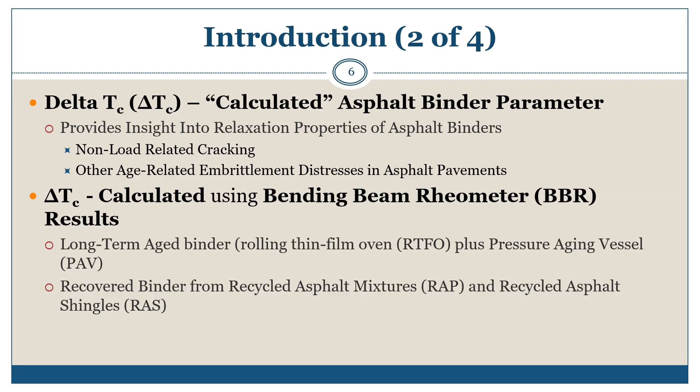Delta TC may be used to evaluate any asphalt binder. Examples include neat asphalt binder with no additives, asphalt binder with additives such as polyphosphoric acid, PPA, and refined engine oil bottoms, or vacuum tower asphalt extender, REOB, VTAE, modified asphalt binders that have been blended with polymers or asphalt additives, and recovered asphalt binder containing RAP, RAS, or combination of these with virgin binders.

Generally, Delta TC may be considered as an indicator of how effectively asphalt binders respond to aging, or how effectively additives impact the response of asphalt binders to aging.

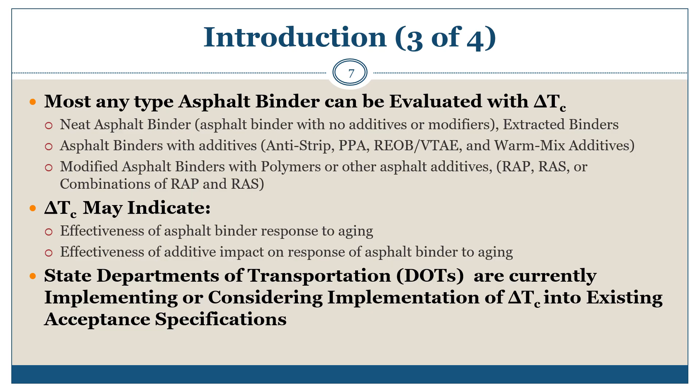Some state departments of transportation, DOTs, have implemented or intend to implement Delta TC as a part of existing acceptance specifications. At the national level, some research projects have considered and are considering Delta TC as part of their studies. This presentation and the companion technical brief present a review and summary of current state of the knowledge of Delta TC as a parameter to characterize asphalt binder behavior.

Information presented is an excerpt and a summary from the Asphalt Institute AI State of the Knowledge Informational Series IS 240, available at the Asphalt Institute website, asphaltinstitute.org.

The objective is to provide knowledge for responsible deployment of Delta TC as an asphalt binder specification parameter should state DOTs be considering implementation. As information on Delta TC evolves and the state DOT has a pressing need to implement, the intended purpose is to provide some preliminary consideration whether to proceed or not. The scope of this report is limited to the deployment of the Delta TC parameter into asphalt binder acceptance specifications.

An advantage of Delta TC is it can be calculated in a straightforward manner from results of BBR tests already used in acceptance. Some brief background comments may provide information on the evolution of the Delta TC parameter.

The delta TC parameter was conceptualized during the Strategic Highway Research Program, SHRP, and later suggested as an indicator of pavement performance in a research project sponsored by the Airfield Asphalt Pavement Technology Program, AAPTP, Project 06-01, Techniques for Prevention and Remediation of Non-Load Distresses in Hot Mix Asphalt HMA Airport Pavements. The goal was to identify simple asphalt binder and mixture tests which could predict imminent cracking or raveling so that pavement preservation strategies could be timed to delay or prevent damage on general aviation airports. The study concluded that delta TC had promise as a tool for neat asphalt binders to predict ductility and analyze durability related properties of aged asphalt pavements. Delta TC has evolved as a parameter used to evaluate relaxation properties of asphalt binders. More information on the origin of delta TC can be attained from Chapter 2 of IS 240.

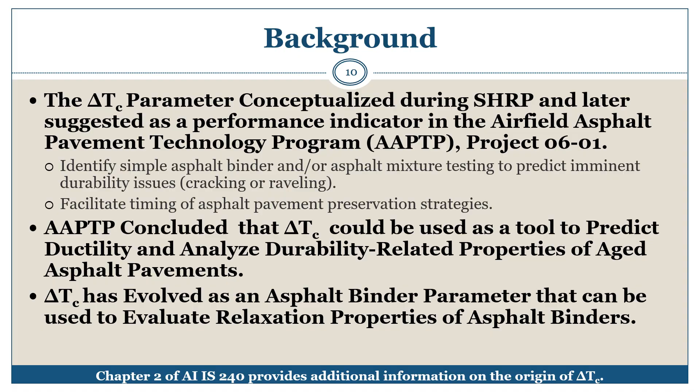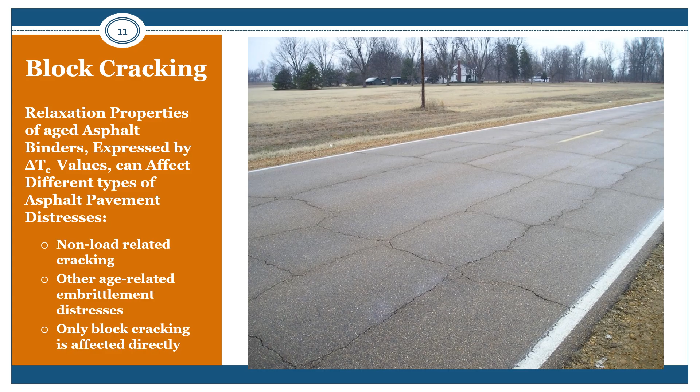Relaxation properties of asphalt binders expressed by delta TC values can affect several types of asphalt pavement distresses, including non-load related cracking and other age-related embrittlement distresses. Only block cracking, as presented in this photo, has been directly correlated to delta TC. Several factors can contribute to other forms of distress: fatigue, edge, longitudinal, reflection, and transverse cracking, raveling, and potholes. It is most likely readily apparent the indirect relationship delta TC has with the pavement distresses listed in this table. While delta TC may be a contributing factor, pavement structure, environment, and loading are among other factors that may also contribute to these distresses.

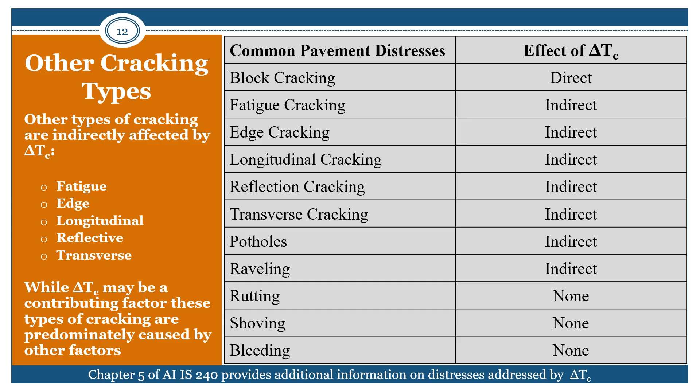How is delta TC determined?

The delta TC parameter is an indicator of how effectively asphalt binder responds to aging and how incorporation of additives may impact the response of asphalt binder to aging. Delta TC is represented as the difference in critical low temperature values of asphalt binder according to the SuperPave performance grading methodology. Results from the BBR test, AASHTO T313, are used to calculate delta TC. The critical temperature, T sub C, for both creep stiffness S, designated as T sub CS, and creep rate M, designated as T sub CM, are determined at the specified performance grade PG limits according to AASHTO M320, performance grade binder specification, or AASHTO M332, MSCR performance grade binder specification, with condition and limit values of 300 megapascals and 0.300 respectively. Delta TC is then calculated by subtracting the M critical T sub CM temperature from the S critical T sub CS temperature.

This figure presents a graphic depiction of delta TC. This is where the M value, the temperature where the M value is exactly M equals 0.300. This is where the S value exactly equals S equals 300 megapascals. The delta TC is the differential between these two temperatures, or delta TC equals T sub CS minus T sub CM, which gives us the delta TC. In this case, the delta TC is a positive 1.4 degrees Celsius.

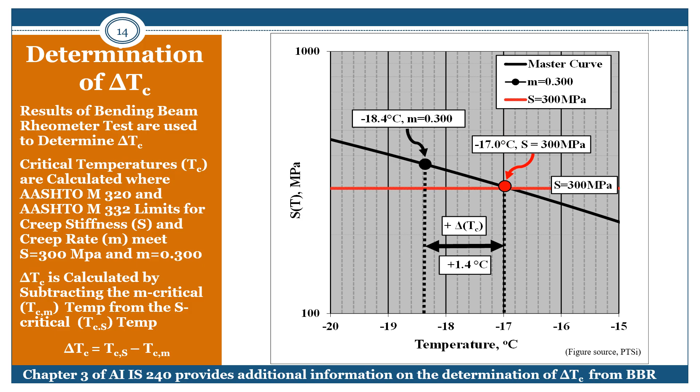What does all of this mean? Depending on the values of T sub CS and T sub CM, the sign of delta TC is either positive or negative, which indicates whether the binder's low temperature performance grade, PG, is governed by its creep stiffness S value, which is a positive delta TC, or governed by its creep rate M value, which is a negative delta TC. A positive delta TC value indicates that the binder is S controlled, failing the S criteria before the M criteria, while a negative delta TC value indicates the binder is M controlled, failing the M criteria before the S criteria.

The magnitude of the delta TC value, or the absolute value, indicates the degree to which the binder is M controlled or S controlled. In this figure, you can see we have an unaged binder where we have M here and S here, and the delta TC is a positive 1.4 degrees Celsius, which means the S criteria fails before the M criteria. And here we have this same binder aged 20 hours in a PAV, and now you see it's reversed. The M value is failing before the S value, and now we have a negative 1.6 degrees separation for the delta TC.

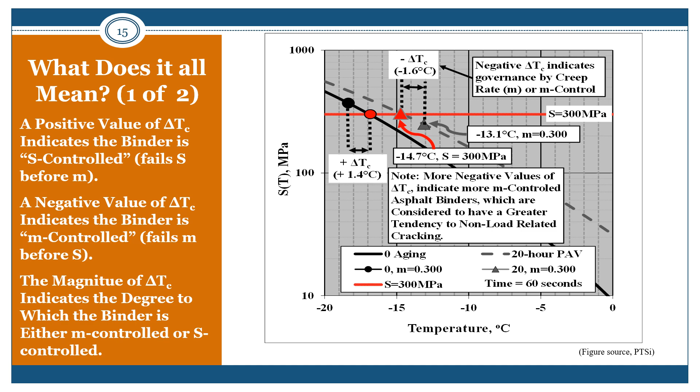In this presentation, delta TC values are presented as degrees Celsius. It is important to understand that the delta TC value represents a difference in temperature, Celsius degrees, as opposed to a specific temperature. Additionally, the negative value does not represent a negative temperature, but that the parameter is M critical creep rate controlled. Again, the magnitude of the delta TC value indicates the degree to which the binder is M controlled or S controlled. The industry has pretty much accepted the degrees Celsius nomenclature, so we'll use this throughout the presentation.

It's what will be used probably in the specification parameters. Research has indicated that more negative values of delta Tc appear to be strongly correlated to non-load related cracking and other distress related to poor relaxation properties.

A delta Tc specification warning limit of minus 2.5 degrees C at 20 hours PAV aging, and a failure limit of minus 5 degrees C at 20-hour PAV aging, has been suggested for consideration as potential specification criteria. In other words, minus 5 is more negative than minus 2.5. Therefore, a delta Tc value of minus 5 degrees C is perceived to be worse than a delta Tc value of minus 2.5 degrees C.

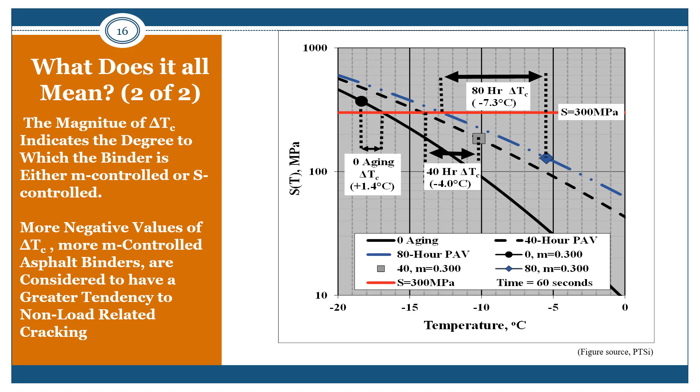What are some elements that impact delta Tc? An asphalt binder's response to aging is the primary element affecting delta Tc. As asphalt binder ages, the delta Tc differential generally becomes greater and more negative, indicating what is believed to be loss of relaxation properties as the asphalt binder becomes more M value controlled.

The effects of aging on the delta Tc parameter calls to question what degree of laboratory aging is necessary to adequately evaluate delta Tc as it relates to field performance. There's not a simple answer to this question. Binders will need to be aged relative to the degree of distress with aging in the field.

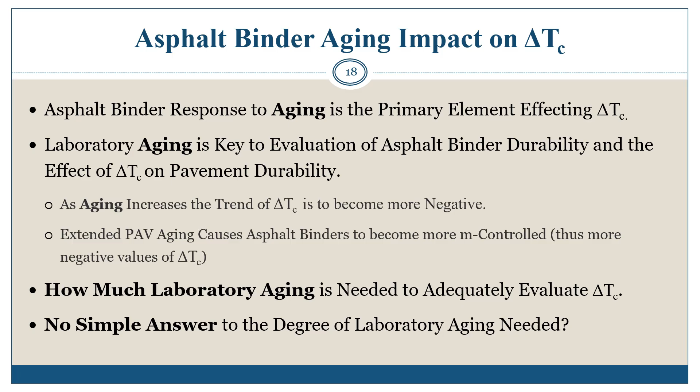Let's try to summarize what we've discussed in a review of the data and figures thus far. The first figure, from left to right, is the original figure showing the positive delta Tc of 1.4 degrees, S controlled. After 20 hours of PAV, we have the negative delta Tc of minus 1.6 degrees, or M controlled. If the aging extended to 40 hours PAV aging, we notice the delta Tc remains negative and has widened to minus 4 degrees. After 80 hours PAV aging, the delta Tc extends to minus 7 delta Tc.

I would like to draw your attention to some important points. Often we are asked, why do polymer modified asphalts sometimes show issues with delta Tc but do not show issues with cracking? With this expanded figure, notice what happened to delta Tc with aging. It went from positive to negative, S controlled to M controlled, or stiffness controlled to relaxation controlled, and we approached more negative values of delta Tc.

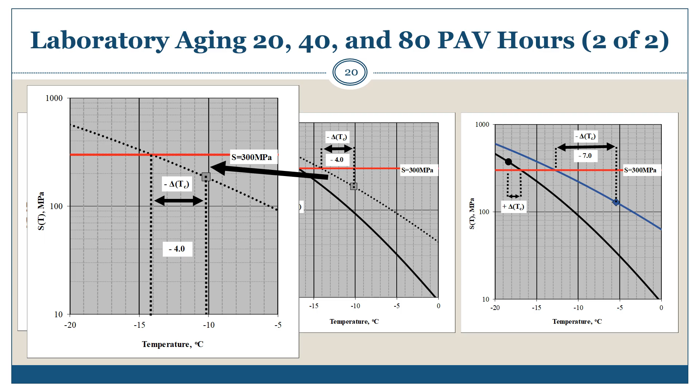From what has been presented, we can see that one of the more critical elements impacting the delta Tc of asphalt binder is aging. Like extended aging of virgin asphalt binder, combining pre-aged materials such as RAP or RAS with a virgin asphalt binder could result in an asphalt binder with a more negative delta Tc.

Re-refined engine oil bottoms, REOB, vacuum tower asphalt extenders, VTAE, and other fluxing agents for softening and adjusting low temperature parameters of asphalt binders are also known to impact delta Tc.

As we just discussed, asphalt binders blended with polymer modifier can also be evaluated for delta Tc. However, there are concerns on the validity of characterizing polymer modified asphalt binders using delta Tc. Some features of elastomeric polymer modification may have a worsening effect on delta Tc, and therefore make it appear as if the polymer modified asphalt binders are exhibiting diminished durability.

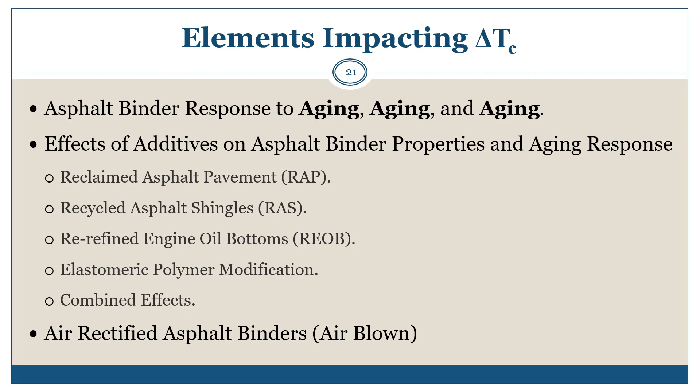Combined effects of all these factors should also be considered. One element that we do not speak much of in the U.S. are air-rectified or air-blown binders. Air-rectified binders are somewhat pre-aged and would also affect the results of delta Tc.

This table shows that addition of recovered RAP binders to virgin PG 52-34 and PG 64-22 produce either decreasing positive values or more negative delta Tc values with increasing RAP contents. The primary thing to note from this figure is that as the binders age, the positive delta TCs decrease or become negative, or more M-controlled.

For example, the PG 52-34 binder plus RAP B goes from an S-controlled delta Tc of 2.2 to an M-controlled value with the addition of more RAP. This gives a general idea of the impact of RAP on asphalt binders with respect to delta Tc.

You can see that most of these either have lessening positive numbers or wider negative numbers of delta Tc. This was RAP in two different binders, three different RAPs, to give you the example of three different RAPs in two different binders.

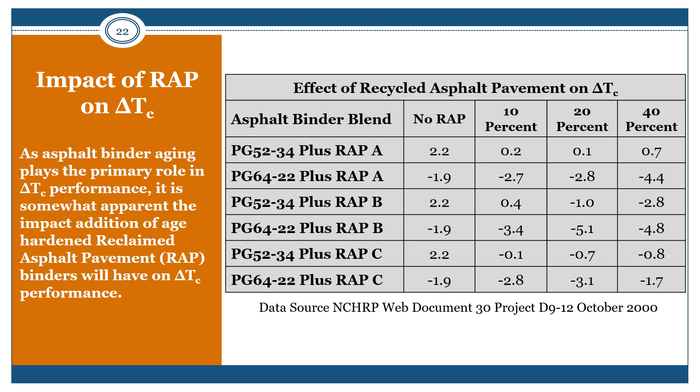This table presents estimated delta TC data from RAS binders from the National Center for Asphalt Technology NCAT report 1601, as reported in TRB E-Circular 241, and additional data from the Asphalt Institute IS-240.

RAS asphalt binder is highly oxidized and very stiff. Therefore, RAS is expected to impact delta TC to a higher degree than experienced with RAP asphalt binders. Calculation of delta TC of RAS asphalt binder is not as straightforward as with RAP asphalt binder due to RAS binder stiffness. This highlights some of the issues with delta TC.

Extraction and recovery commingles the RAS and the virgin binder, whereas this does not occur at the same extent in the field. You can notice that these numbers for delta TC are quite wide for the RAS binders, and the reason is the T sub C temperature is much higher than we would see on an asphalt binder used in paving.

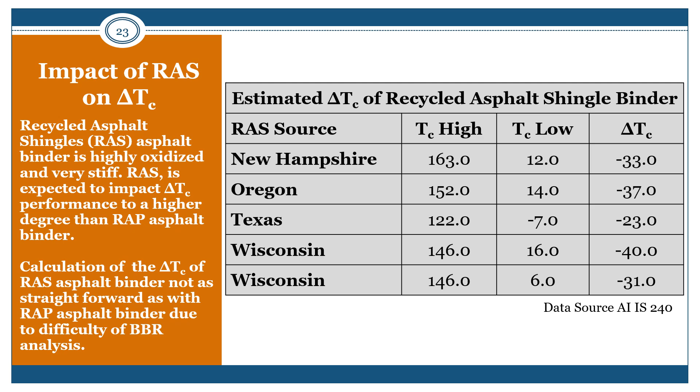Some steps to implementation of delta TC: one of the more important steps is familiarization. Familiarize yourself with delta TC. Understand it, don't just look at the number. Understand, as we have discussed, what happens to stiffness of the binder with respect to aging. What happens to M value with respect to S value? How does it affect the performance of the binder?

Asphalt Institute IS-240 is a great starting point to really familiarize yourself with delta TC. This is about 70 pages of valuable information.

Note that the delta TC parameter is primarily intended to address durability related distresses. Understand that more negative values may have an indirect impact on other forms of cracking other than block cracking. However, block cracking is the only mode of cracking that has been directly related.

If you have a cracking issue, clearly understand the performance challenge to be addressed. Ensure that delta TC is the proper parameter to address the issue. Understanding of a problem first may make the solution more attainable.

The delta TC parameter is more than a number. It is not a panacea to cure all cracking issues. Just specifying a number will not address all cracking issues. We really need to understand what is occurring with the pavement performance and with the binders.

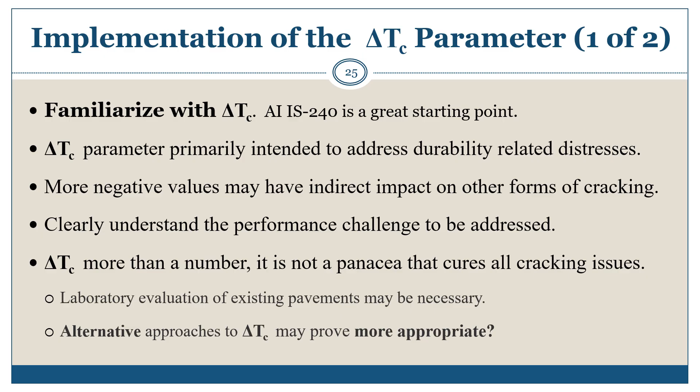Laboratory evaluation of existing pavements may be necessary. Realistically, they will be necessary if we truly understand the issue. There are alternatives to delta TC parameter, and some of these may be more appropriate.

Currently, there does not appear to be strong industry consensus as to the effectiveness of delta TC as a specification parameter. Overall sentiment of agency practitioners and others in the asphalt pavement technical community is somewhat mixed.

Asphalt Institute IS-240 suggests a systematic approach for consideration and implementation of delta TC. This framework entails 5 steps. Step 1, clearly identify the problem delta TC is intended to address. Step 2, determine whether delta TC is the most favorable alternative.

Step 3, select an aging method to ensure delta TC measurements are representative. Step 4, evaluate existing pavements that exhibit diverse cracking behavior. And step 5, evaluate delta TC results obtained to determine simulative aging protocol.

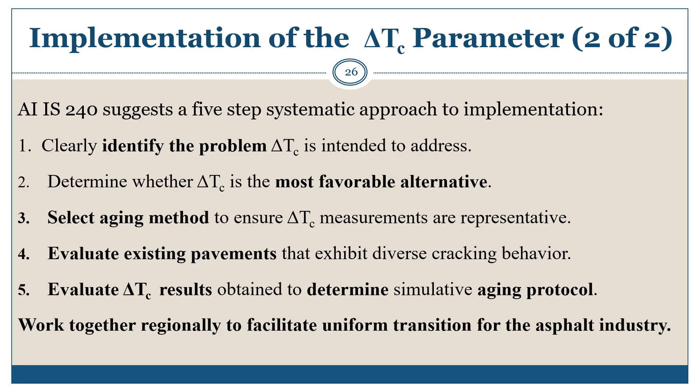A complementary element to the recommended framework is a concerted effort with all entities working together regionally to facilitate uniform transition for the asphalt industry.

Alternatives to the delta TC parameter. Cracking has become the predominant distress affecting pavement performance in the United States. Over the past several years, numerous new asphalt binder cracking properties have been evaluated. Delta TC is just one such property considered.

Correlations between delta TC and other rheological parameters have been suggested, such as the Glover-Rowe parameter. Relationships of other rheological parameters have also been discussed, such as the rheological index, R, as a parameter describing the shape of the rheological master curve, which is critically related to the shape of the relaxation spectra and the ability of the material to relax stresses.

Additional master curve related parameters have been suggested, including crossover temperature, T sub delta, and crossover modulus, G star sub C.

Asphalt technologists have also suggested specifications limiting S at the critical M value. For example, specification limits for acceptable delta TC values, or specification of a minimum S value where the M value meets a current specification limit of 0.300. Establishing a minimum S value acceptance criteria is a reasonable alternative and does a reasonable job of screening asphalt binders with large negative delta TC, as well as limiting the effects of improper use of deleterious additives.

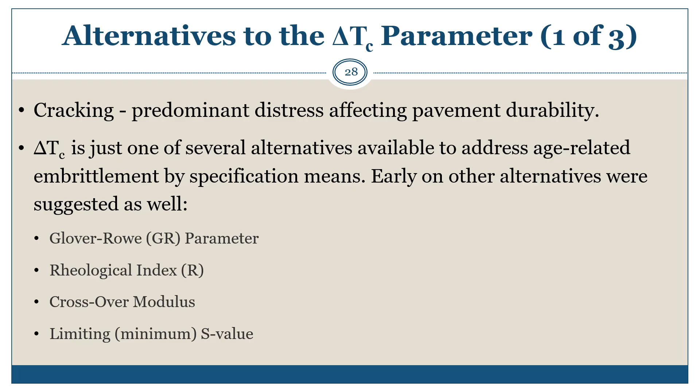More recently, ongoing research indicates that the delta TC parameter may be more effective at identifying effects of deleterious additives in asphalt binders than as a predictor of asphalt binder cracking and durability. Like the minimum S suggestion, this research prefers a minimum S value for a given M value, except for incorporation of modeling concepts to suggest variable S value minimums applied to variable M values for specific values of delta TC. This may sound complicated, however, it's quite simple.

For example, if delta TC is minus 8 degrees C, then the specification limit would be a minimum S value of 125 megapascal, with an allowable increase of the minimum S value to 150 megapascal for M values greater than 0.32.

Considering these observations of the delta TC parameter's functionality to identify deleterious additives, it is understandable that the delta TC parameter could be used to identify presence of non-bituminous asphalt binder components. However, more straightforward methods of restricting use of unwanted asphalt binder additives are possible.

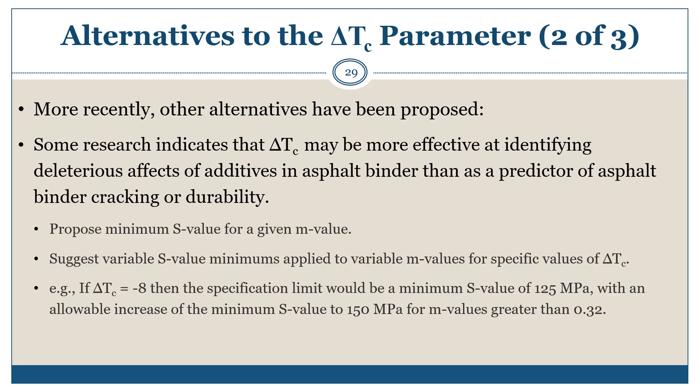Recent work by the Western Research Institute, WRI, under NCHRP Project 9-60 builds on previous research to address durability and cracking issues related to asphalt binders. A delta TF parameter was proposed by the Project 9-60 researchers as the asphalt binder property relating most closely to durability. The delta TF parameter incorporates a binder fracture test using asphalt binder cracking device, ABCD. This uses results from delta TC and delta TF after 20 hours of PAV aging.

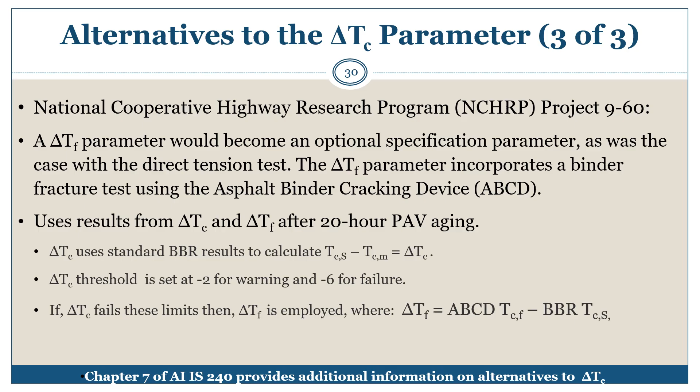Delta TC uses the standard BBR results to calculate T C sub S minus T C sub M, equal to delta TC. The delta TC threshold is set at -2 for warning and -6 for failure. If delta TC fails these limits, then delta TF is employed, where delta TF equals the ABCD T critical F minus BBR T critical S.

Status of implementation of delta TC. A recent state-by-state review of the Asphalt Institute U.S. Binder Specification Database of published asphalt binder specifications revealed 10 state DOTs have adopted a delta TC specification parameter. This is slightly different from what the state DOTs reported by AI IS 240 to have adopted a delta TC specification parameter. Texas originally specified a delta TC of -6.0, but have since removed this requirement and are evaluating other methods and considering the relationship of S value to a given M value.

Most, but not all, these state DOTs adopted minimum limits of delta TC of -5.0. Oklahoma specifies delta TC of -6.0, and Utah requires delta TC of -2.0. For the most part, the split between state DOTs using 20-hour and 40-hour PAV aging protocols shows that states in warmer climates using PG64 binders tend toward 20-hour PAV aging, while states in colder climates using PG58 binders prefer 40-hour PAV aging. In preparation for this webinar, a quick check of state DOT specifications did not indicate changes in this status.

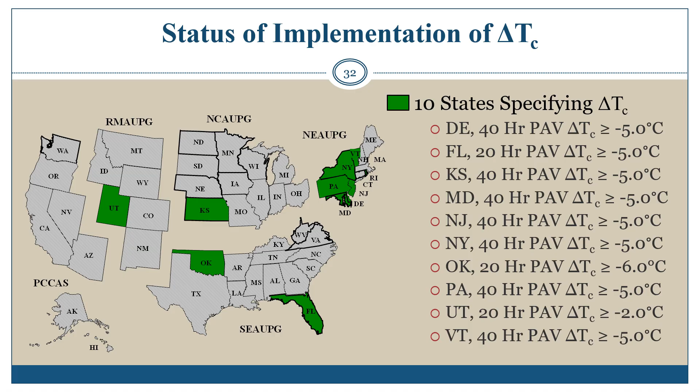Some summarizing comments. This presentation and companion technical brief present a review and summary of the current state of knowledge of delta TC as a parameter to characterize asphalt binder behavior. It relies on a state-of-the-knowledge document by the Asphalt Institute entitled 'Use of the Delta TC Parameter to Characterize Asphalt Binder Behavior.' The objective of this presentation is to provide knowledge and technical support for responsible deployment of delta TC as a specification parameter into asphalt binder acceptance specifications, should state DOTs be considering implementation.

The purpose is to provide some preliminary considerations, a yellow light so to speak, if a state DOT has pressing needs and wants to proceed with implementation, while acknowledging that the information on delta TC continues to evolve.

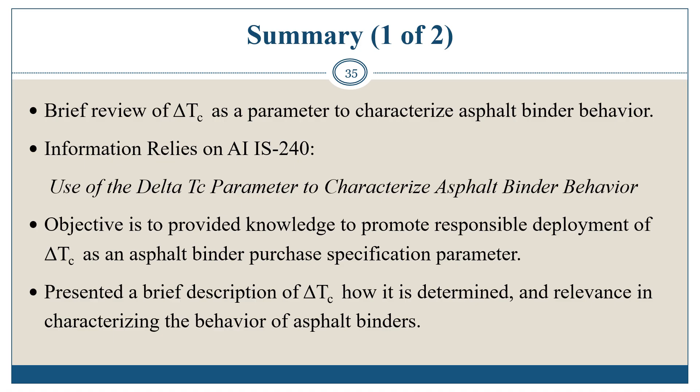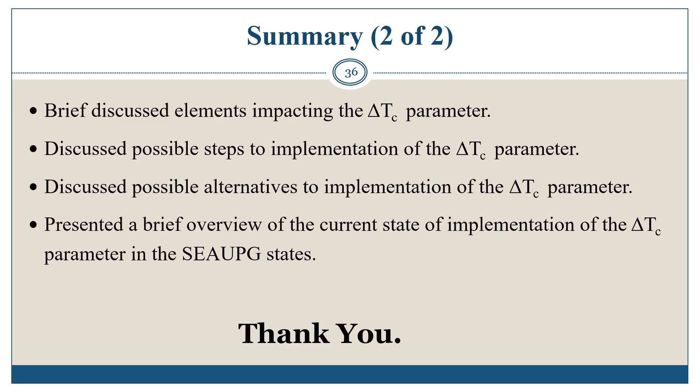A brief description of delta TC, how it is determined, and its relevance in characterizing the behavior of asphalt binders has been presented. Elements influencing the delta TC parameter were discussed. Of significant issue is the degree of laboratory aging needed to be useful and practical for specification purposes. Discussed were possible steps to implementation of the delta TC parameter, as well as alternatives to implementation. A brief overview of the current state of implementation of the delta TC parameter in the U.S. was presented. This concludes the presentation of the delta TC binder specification parameter.